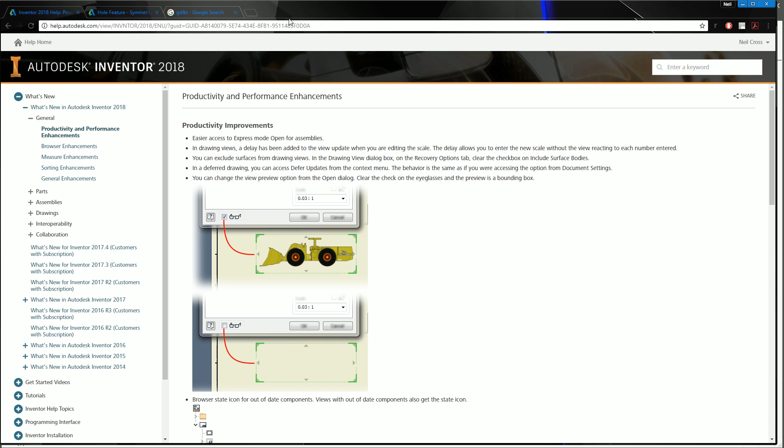So easier access to express mode. What that means is when you're opening up an assembly, you've now got a drop down list for opening to express mode rather than having to go into options and then full or express. You've now got this little drop down here which will list full or express, which it's not doing on this assembly for some reason because it's obviously an old version, but there you go, full or express. So that's a nice little enhancement for 2018.

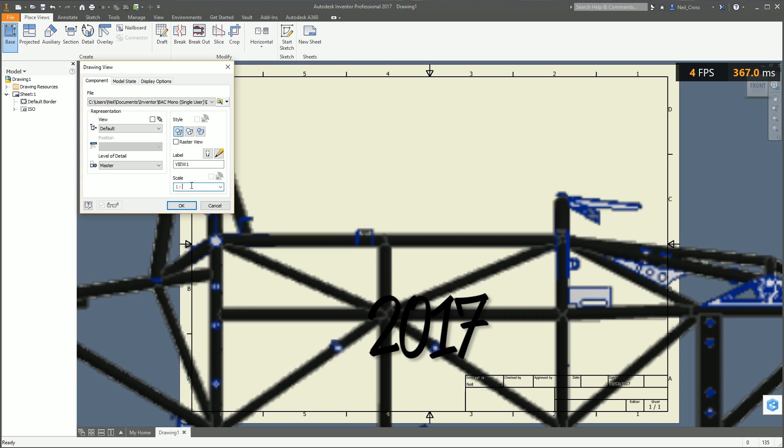In drawing views, a delay's been added to the update view, which is really nice, actually. I really do like this one. This is something which I never even realized was a thing until I tried to do it myself, and I was like, yeah, that is pretty annoying. Why did I not realize that was a thing before?

So in 2017 and before, when you're typing in the scale of a view, say for example, if I want to type in 1 to 10, it would change the view to 1 to 1 and then 1 to 10 as I'm typing it. But now there's like a second delay. So when you remove the number, about a second of a delay before it then changes the view, and that just gives you time to type the numbers in before it starts changing the view and killing your computer. So that is really nice.

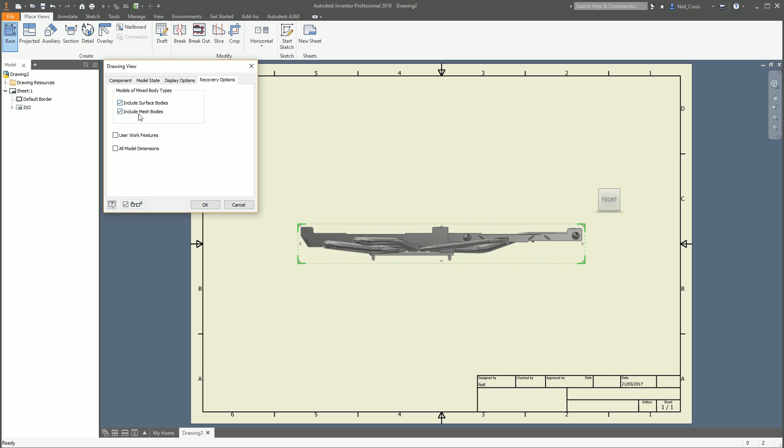That is really nice. Another new thing as well at the top, recovery options. Include surface bodies, include mesh bodies. So this turns off any surface bodies, all surface bodies in your assembly or part if you've got any in there. I'm not really sure why they've called it recovery options. I don't know what it recovers. It's not recovering it, it's just turning stuff on. I don't know why it's called that, but it is what it is. But that's what it does.

Okay, right, what else have we got in drawings? You can defer drawing updates straight from the right-click menu. So right-click, defer updates, that's nice. That's just, again, a quality of life thing. Instead of having to go into Tools, Options, Drawing, and then using that ticky box there, it's now straight from the right-click option.

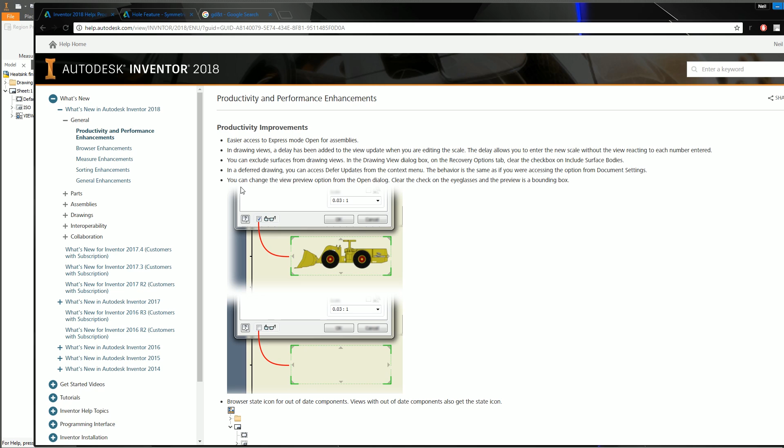Okay, what else we got? You can change the view preview option, right? So this is when you're editing a view or creating a view, you can turn off the preview. So if you are working on a massive assembly or a massive drawing view, and every time you want to change the view orientation, you're not having to wait for it to compute the view every time. You can just do that with the preview off and then click OK, and then offload the processing time to a point in the future. So that is nice.

Right, scrolling down, parameters. This is definitely worth a mention and also a demo. It's something small, but it's such a quality of life thing. It'll make a massive difference to a lot of people. In 2017 and before, when you're in the parameters dialog box, Inventor just lists all the parameters, like, seriously, D434, 7mm? What the hell is that? I have no idea. I have no way of finding out what this affects.

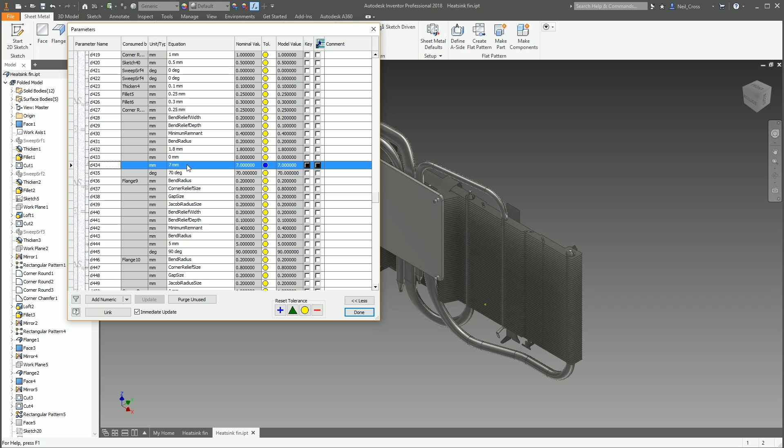So now what you can do is you can select this filter here, go to by features, it clears the parameters box, and then you can pick a 3D feature and it'll list all the parameters that control that feature. So all of these parameters here have an impact on this. So yeah, that's nice. Then you can click this button here to clear the parameters and then select a new feature by hitting that red arrow and then picking that there. That's nice. I do like that.

That's a nice improvement. All right, now scrolling down towards the bottom of this first general productivity and performance enhancements page. Performance enhancements. I've got a lot to say about this, which I've actually already said. I've got to say it again, but you don't know that, but I do. I've tried to reproduce a lot of these performance enhancements using a side-by-side 2017-2018 window, using the same model. And to be honest, cards on the table, I can't see many of these performance improvements.

Zoom in and zoom out. This one does, and I've got some footage for this as well. Right, what this line is saying is that the minimum frame rate setting now applies for when you zoom in and zoom out and all related methods of input such as mouse, keyboard, 3D mouse, ViewCube, navigation bar, and ribbon commands. And if you're thinking, well, what the hell is the minimum frame rate? I don't know what the minimum frame rate is.

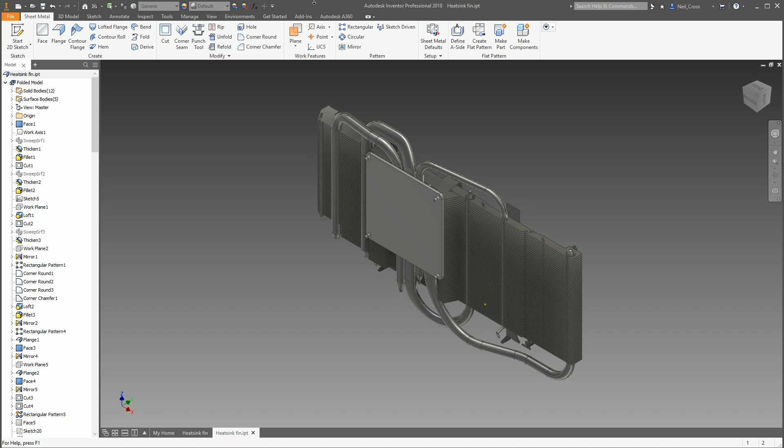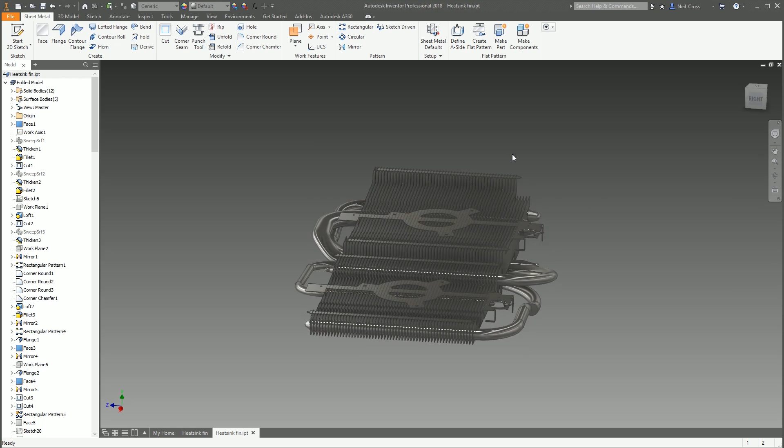Right, frame rate is how many frames every second are being sent from your graphics card to the screen. If you think of a video, this, for all intents and purposes, could be a video. It's a moving image made up of single frames being sent to your screen from your graphics card. The more frames that get sent, the smoother the experience is. So right now you're looking at approximately 60 frames per second. If you're looking at 10 frames per second, you're going to visibly see a jerky effect or a lag as the object is rotating.

So minimum frame rate, which is what this feature here is referring to: zoom in and zoom out now respect the minimum frame rate setting. Minimum frame rate is a setting within Inventor's application options which allows you to control a threshold whereby Inventor will stop itself from going lower than a certain number of frames per second.

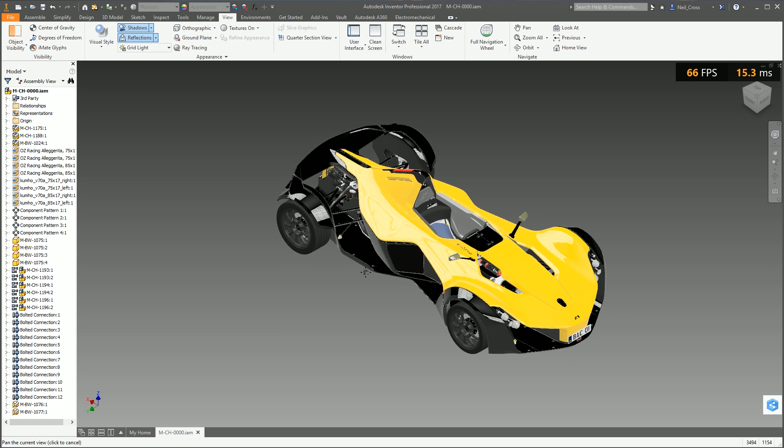So if you're working on a massive assembly and your hardware can't produce more than, say, 8 frames per second, Inventor will start removing objects from within your assembly temporarily, just visually, to try and improve the performance of your system. For example, it will start removing shadows, reflections, smaller objects within the assembly to try and boost the frame rate of your session. And this slide bar here controls what that threshold is.

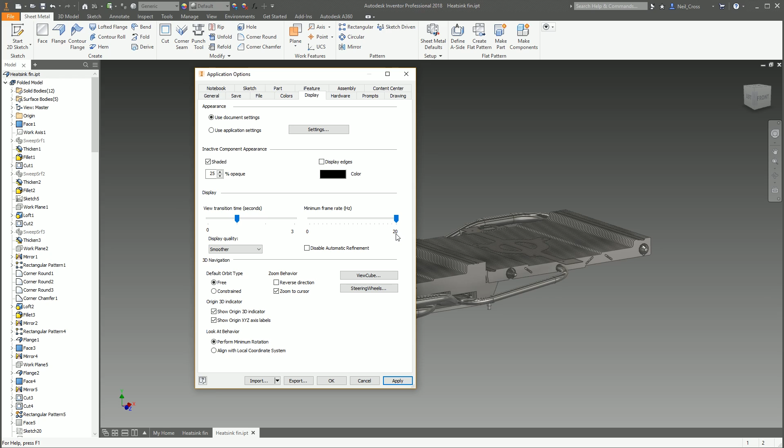If you set it to 0, it won't ever do that. Inventor will just perform naturally. It'll not throttle the performance, it'll not remove any parts to try and increase the frame rate. However, the maximum you can set that to is 20. So now at 20 frames per second or lower, Inventor will start removing assets from screen to try and improve the performance of Inventor. So what this is meaning is that zoom in and zoom out now respect that setting where they didn't do in the past.

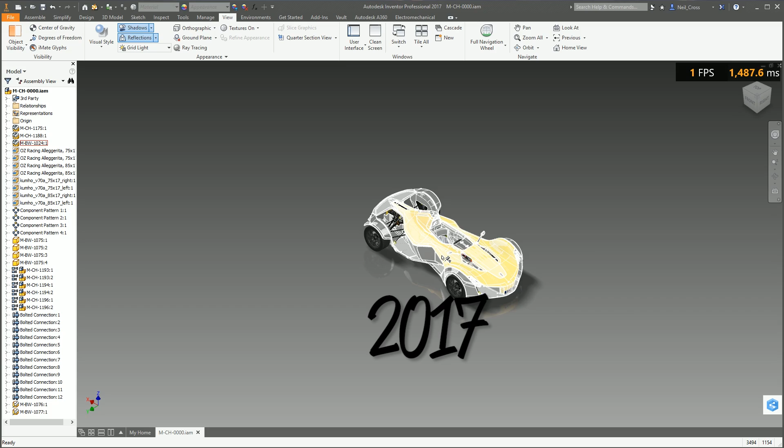I've got a bit of footage now to show that. Zooming in and zooming out, what would happen because it didn't respect the minimum frame rate: if you're working on a large assembly, zooming in and zooming out with a mouse wheel would result in really laggy, slow, jerky performance and also lockups for quite some time as the engine struggled to cope with the amount of data being thrown at it.

What I don't understand here, and I cannot reproduce, is the likes of the 3D mouse. Now I'm using a 3D mouse here. Right, what you're seeing here is a 3D mouse. The 3D mouse has always respected the minimum frame rate setting. It did in 2017, so I'm not sure why it's listed in there. So maybe someone from Autodesk can clarify that.

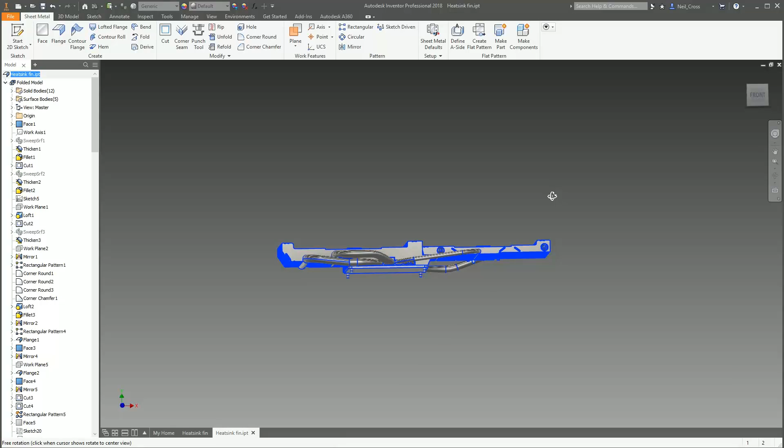The same goes for keyboard. Keyboard input, I'm assuming they mean F4. So holding down F4 and doing an orbit, well, that did respect the minimum frame rate. Same goes for the ribbon bar shortcuts. So for example, here, pan, zoom in and zoom out. They all respect it. So I don't know what that means. Maybe there's a certain use case which they're referring to, which is different to what I'm thinking about.

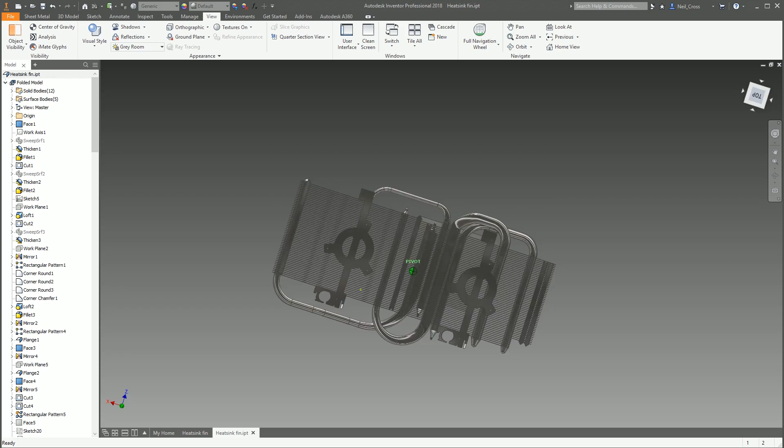But what definitely has changed is the ViewCube. So in 2018, holding the left mouse button down on the ViewCube and moving that around now does respect the minimum frame rate, whereas in Inventor 2017 and before, that would be quite jerky and laggy on large assemblies. But unless you're one of the like 2 people in the world that use the ViewCube to do this, that's not really going to affect you. So I wouldn't worry too much about that.

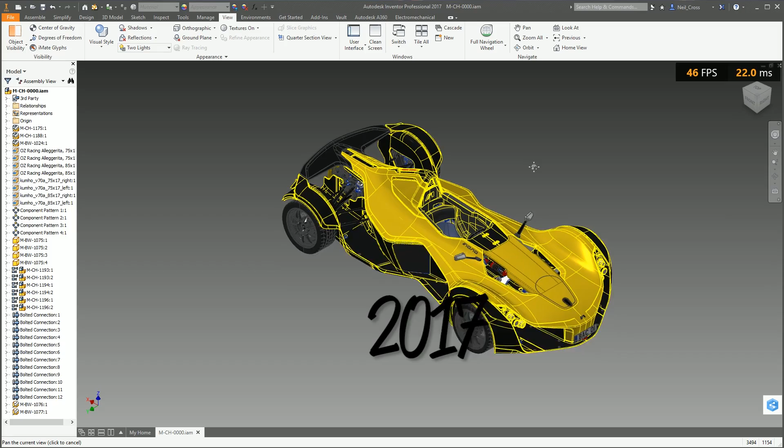Right, the rest of them here, I cannot reproduce any of these if I'm honest. Well, no, I can on this one: faster move, pan, rotate views in models and drawings. This is the only one that I can actually reproduce. This is a faster passive performance experience using Inventor. So having the exact same model open in 2017 and 2018, you get a passive performance benefit in terms of how many frames per second get chucked to your screen when using Inventor 2018.

That's a good thing. It's a good thing that they're tweaking and optimizing the engine passively so that you just get a passive performance gain by migrating to Inventor 2018. What it also says to me though is that for everybody that's been spending a fortune on their hardware over the last few years, they've been bottlenecked by the software. The software has had an optimization issue which they've just fixed in 2018. Just a passive software tweak has given a massive performance benefit, and I don't like that.

Call me OCD, call me paranoid, call me petty and picky, but it makes me think right now, if I go into, for example, Inventor Studio and my PC grinds to a halt, is that the software that's crap? Is that the software that needs optimizing? Or do I need a better PC? Do I need 2 Xeons? What do I need? It makes you question whether lockups for 2, 3, 5, 10 minutes at a time are my hardware or software issues.

So that's kind of highlighting an optimization problem here at some point, but it's good. Either way, it's good that they're making these optimizations and they are aware of the fact that Inventor needs optimizations and they're doing it. So that's a good thing.

Right, the rest of them, assembly open, drawing view creation, faster graph, all of these, I can't reproduce any of these because mostly they happen that fast anyway. You'd need massive assemblies, massive drawings to be able to see any gains between the versions for these. So I cannot reproduce them. I've tried them, but I can't find or reproduce these enhancements. But it's good to know that they're there. They wouldn't have listed them if they hadn't have done something. So that is a good thing.

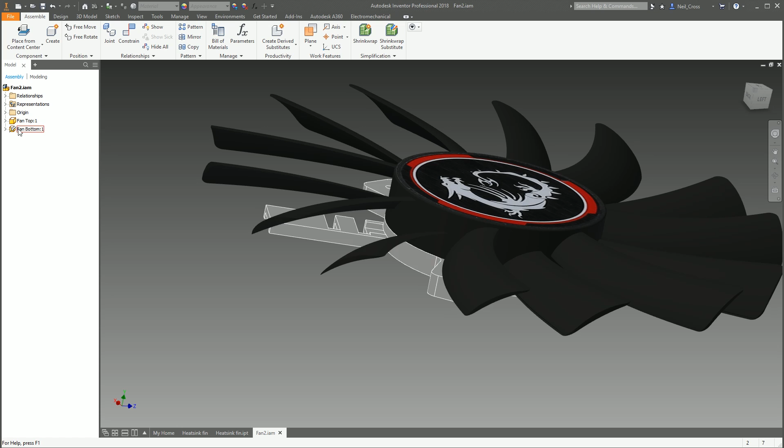And because of all these performance improvements, there's been a few application options removed from within Inventor as a result of these passive enhancements. Right, there's quite a few browser enhancements as well. I could talk about these for ages, but I'll just show you the main ones. So one of the main ones for me is the search. This is massive. I mean, absolutely hugely useful. So whenever you're working in an assembly, this is actually a terrible example because it's a tiny assembly, but you can use this search bar here to now search for any file nested in your structure.

I really should use a better assembly or else you're not really going to see the actual benefits of this. And I would have lots of things open, wouldn't I? Obviously. Because it's just been dumped on me and I've no time to prepare for this. Come on, I said shut down, god damn it.

I said shut down. Right, let's go to a project and we'll go to the samples project and we'll open up something that's relatively large in size. Right, no, don't update. Okay, so when you hit search, you can now do a text search string for anything. Like, for example, if I type in 0062, that'll bring back files that have 0062 in their file name, but it also searches through all the properties, which is really useful. I mean, that is brilliant.

That's like something in the past where they would have just limited it to just the file name, and then we would have had to have kicked off at them and put in an IdeaStation. Why didn't you do it for part numbers and descriptions and materials and stuff? Oh, well, we'll do that in a future release. No, they've just done it straight away. So well done to them for doing that.

That's brilliant. So this part here, you'd be like, well, why has that returned that part there on a 0062 text search? Well, if you hover the cursor over this little button here, it's because the description has the text string 0062 in it. So that's really good. The search facility is brilliant. You can interact with the part straight from the search results and then just clear the results there and then crack on, doing another search if you want to. I don't know what I'm looking for. Shaft. And then we can, yeah. So there you go. That's good.

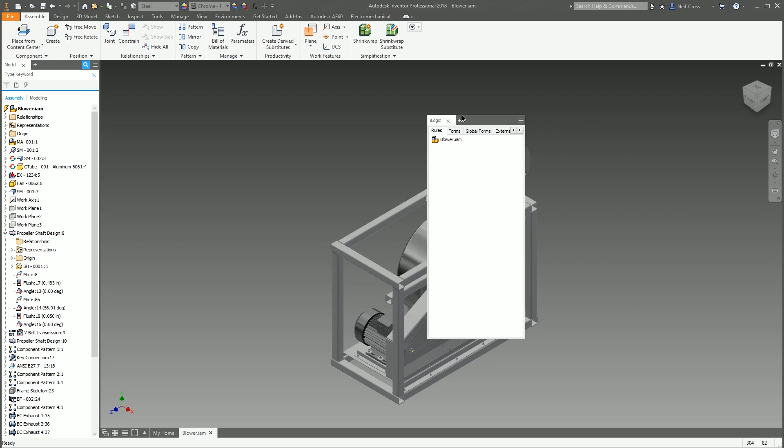Right, so additional browser enhancements. We've now got removable browser panels. So for the likes of the Vault panel, which I don't have because I don't have Vault 2018 yet, you can hit this little plus here, and then you can add an additional model browser and then remove that, and you can do this with the Vault panel now. Move that onto a different screen and dock it, which is brilliant. It really is brilliant. So you can add them up at the top and then flip between the two.

We've also got these two little hyperlinks here, which flick the browser structure between, for example, assembly mode and modeling mode. And if you go into, not that, for Christ's sake, if you go into like Inventor Studio, that introduces another hyperlink here, which changes the browser structure to suit that environment. So it's like an environmental context browser tree, so that's nice.

Right, the measure enhancements. This is something that I'll dedicate its own video to, but the measure tool has now been consolidated into one button rather than having multiple buttons that measure.

It's all confined into one button, so that's nice, and I'm sure they've improved what the measure command does and its workflow, so that's a good thing. And as you can see, quite a few of these new features have been brought in from the Inventor Idea Station, the wish list, so that is always really reassuring to see that at least the Inventor team are looking at the Idea Station and then bringing ideas over from there into the product.

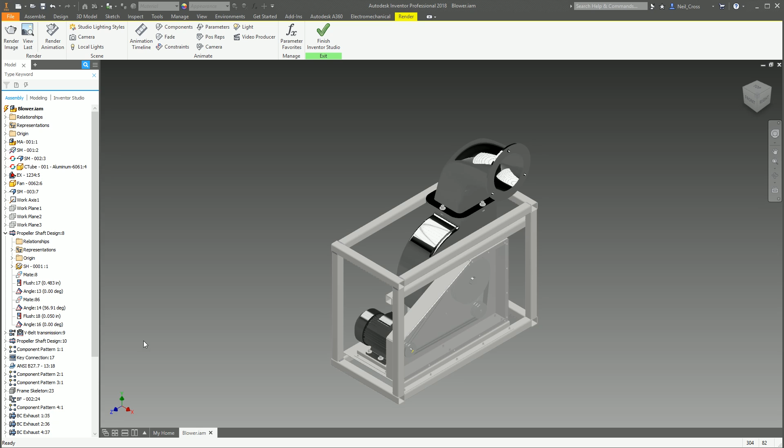Right, over to general enhancements, and this is like, I want to kiss somebody for this. The mini toolbars no longer display by default. Hallelujah! I mean these things here, these horrible, disgustingly terrible mini toolbars that linger around like a stray cat after food. Right, so for example, if I go to a new model and then model up, I don't know, just draw a box or something, right? Let's just do a circle, hit finish sketch.

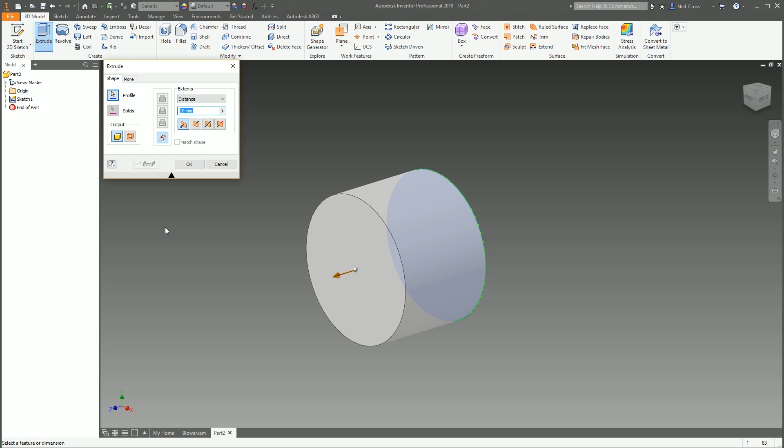When you've executed any command along the top, it would bring up these nasty little toolbars that would just follow your cursor around like a bad smell. And they were just in the way all the time. Click, click, click. It would just follow you around in your face. It was like, just go away. Just sod off, would you? I don't want to use you. Stop being all Windows 10 on me. Get out my face. But you couldn't get rid of them. But now they're gone. There is a way to bring them back, but I have no intention of telling you how or finding out myself, because they're off, and they're off for good.

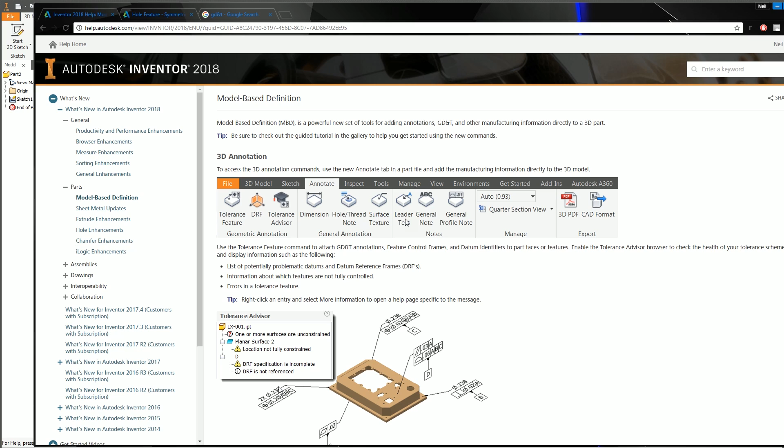Right, over into part enhancements. So this is one of the big features, obviously, in 2018, model-based definition, 3D annotation. Rumor is that this should have been in 2017, but it was pulled quite late because it wasn't ready. Hats off to them for not putting it in when it wasn't ready. So now we can do 3D tolerances inside the CAD model and then filter them through into the drawing. So this is brilliant. This looks like something a lot of people are going to be able to use, but I will need to do a separate video on this rather than just cover it in brief in this video.

Sheetmetal updates. This is a game changer as well for a lot of people that use Sheetmetal. Up until now, you couldn't realistically use multi-bodied parts with Sheetmetal, because you could only have one style and one thickness across your entire part. You can now have a unique thickness and a unique style per solid body, which is a game changer, because that was a showstopper for people in the past using Sheetmetal, so that's really good.

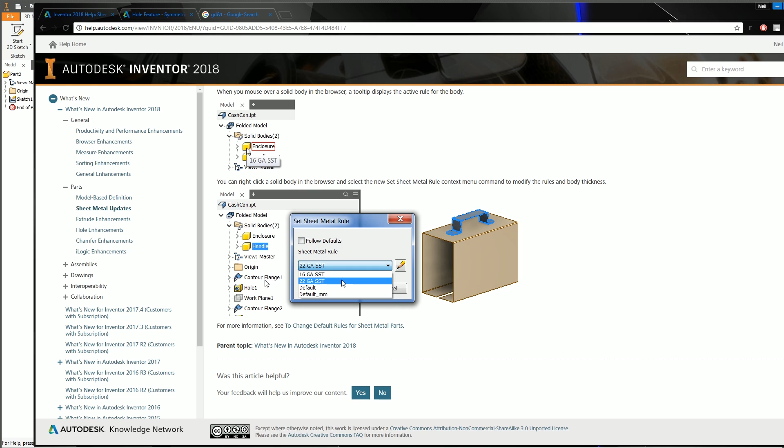Extrude enhancements. There's a new extent option in the extrude command called distance from face. So this lets you create an extrude from a sketch and then start the extrude at a distance away from a face. So that's nice. This is again going to need its own video, because there's a hell of a lot of different alternatives and configurations you can go with this. But for now, it's just worth knowing that there is a new extrude from face on the extents option in extrude. A few new hole enhancements, again from the Idea Station. So you can now do an asymmetric hole, which extends both ways from the point or face, which is quite nice.

Chamfer enhancements. We can now do partial chamfers. Chamfer's been a weird one for ages. Fillet and chamfer are always covered together in a training course, and it's like, here's the fillet command, nice fancy dialog box, loads of little mini toolbars which have now gone, and then the chamfer command was this naff dialog box. It never really got much love, but now we can do partial chamfer, so that's a start for giving it the love it deserves. Hashtag love for chamfers. Yeah, partial chamfers, that's good.

Okay, over to assemblies. Assembly open enhancements. So I've covered this. You can now open to express mode from the drop down on the main open dialog box, which is good. Over to shrink wrap. There's been quite a few shrink wrap enhancements. This is definitely going to need its own video, because the shrink wrap videos I've done already on the channel are now out of date. They've overhauled the shrink wrap command. It makes it a lot more user friendly, there's a lot more options, it's a lot easier now to do a shrink wrap, it just makes more sense. So I'll have to do a new video on shrink wrap in the future. Right, over to drawings. Drawing open enhancements.